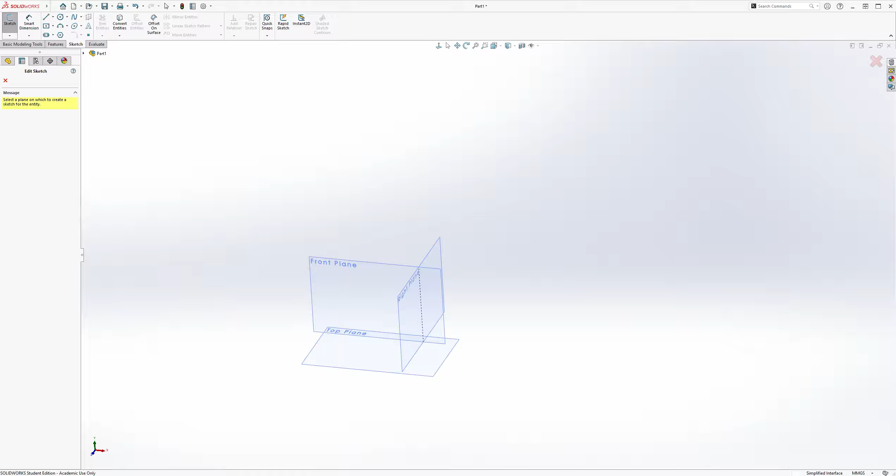So let's get started. Today we're going to be making a cup with a handle. And this part, I actually had to re-record this because I got stumped on the part where you hollow out the cup, but I'll show you exactly how to do that later. This is actually a very interesting part, probably one of my favorites I've done so far.

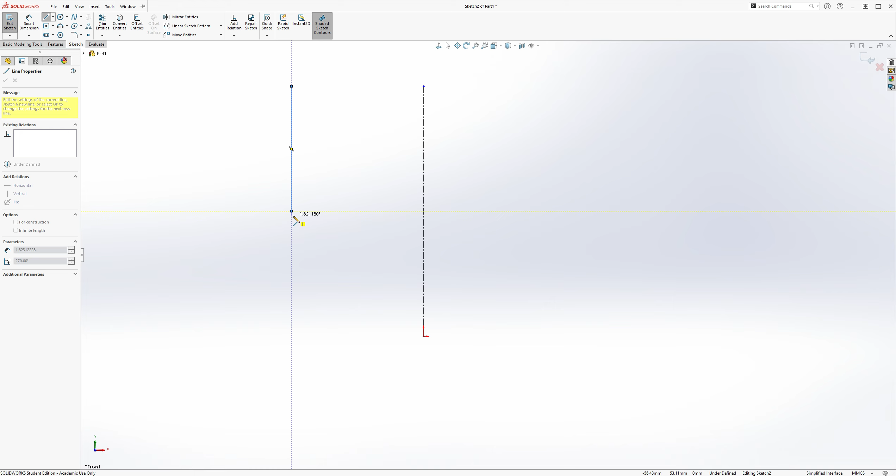But first, make sure your units are on MMGS down here. Then we're going to start with a base revolve. And if we need a revolve, we need an axis of revolution. So I'm going to start with a straight line down like this. Then we're going to go into an arc, a steep arc, till it's horizontal with the origin, and I'll finish off with a horizontal line.

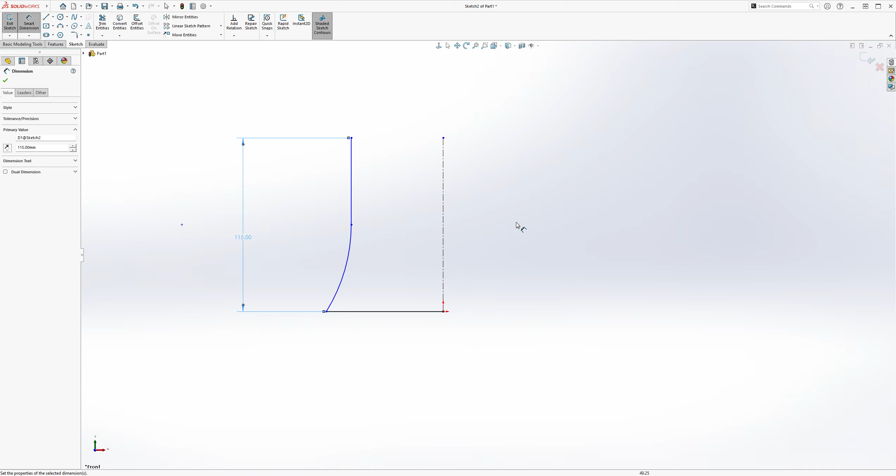And so let's start our dimensions. The total height of this part is going to be 115. Now let's establish the total width. The total width will be the bottom of the cup, which is going to be a diameter of 100. So I'm going to click this far left corner, hold onto the center line, and then drag it down. That's a unique tool in SolidWorks, which actually allows you to kind of have a preview of the total revolve. Really neat feature.

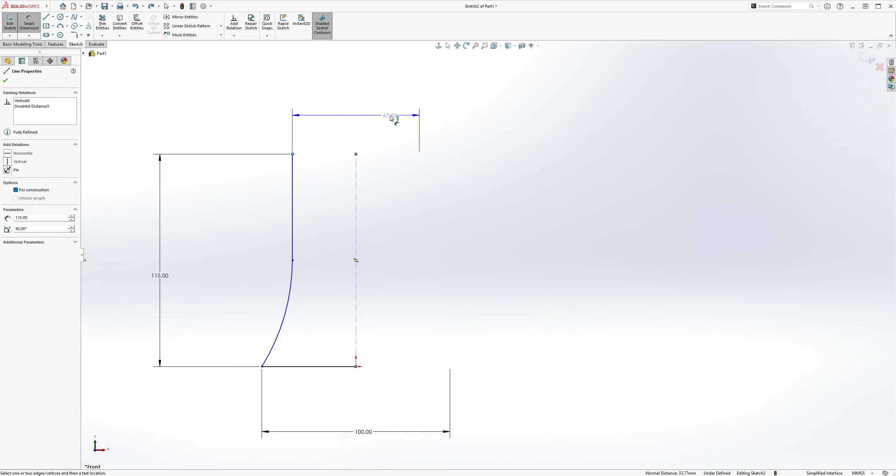And we're going to do something very similar on the top side. We're going to click on this top point, hold the center line, and drag it up. Oh, I did that wrong. Let me go back. Click on the top point, hold the center line, drag it up, and the top diameter is 75. So I'll make this 75.

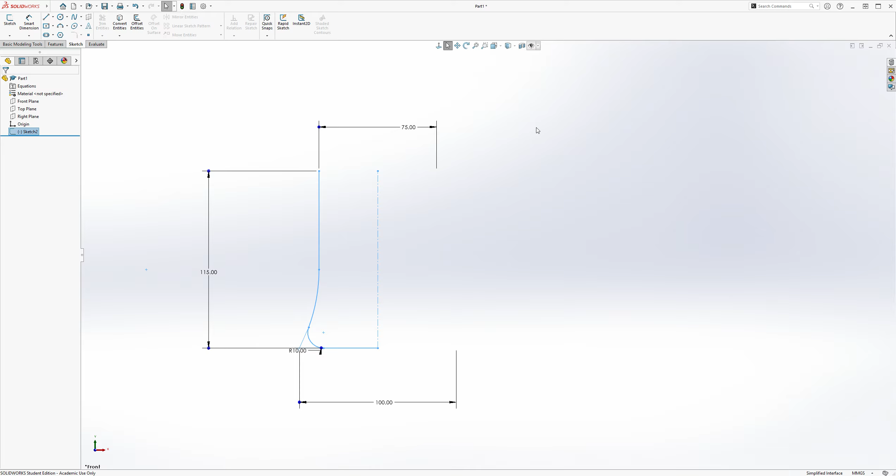Now let's add a fillet of radius 10 to this bottom corner here. Select OK. And you'll see that all the tangent, well actually I believe I have my constraints turned off. Yes, I actually have sketch relations turned off. I don't know why I had them turned off. That's weird. Alright, let's go back to the sketch. Now you can see sketch relations.

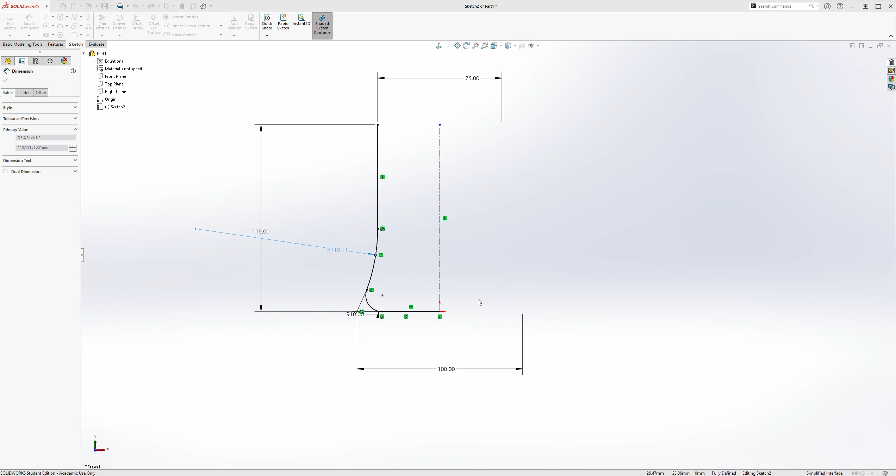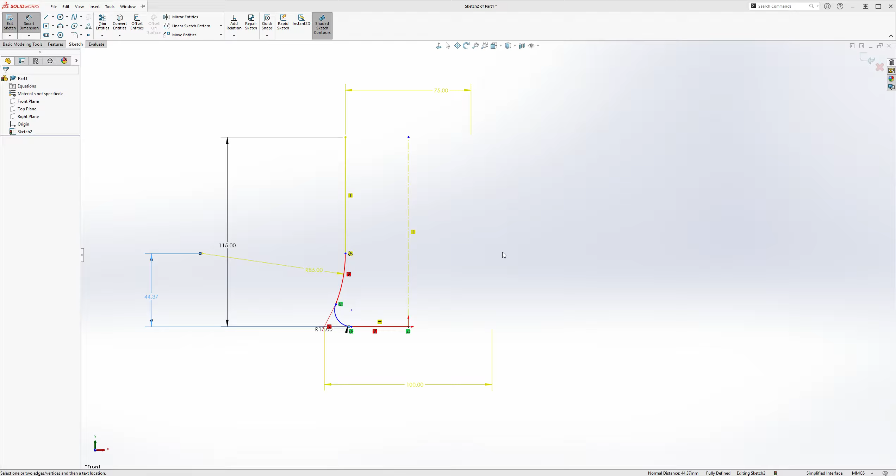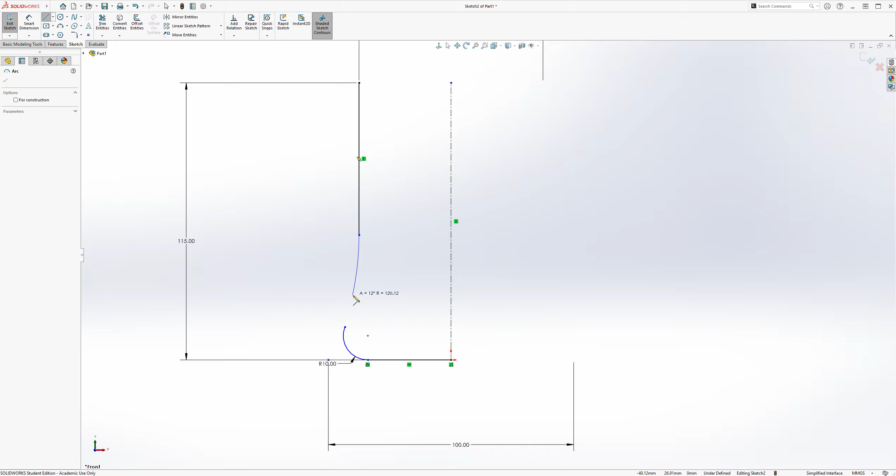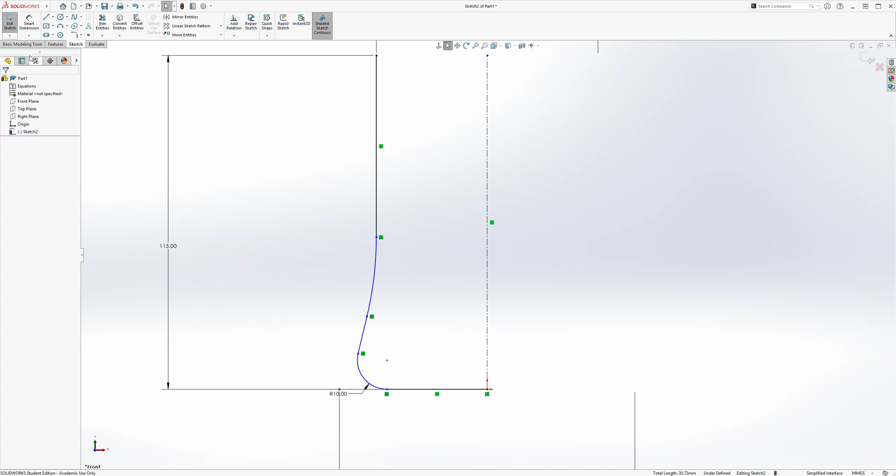I forgot that there's actually supposed to be a diagonal line. So it's like you make a steep arc, like so, but then there'll be a diagonal straight line like this. The drawing is a little deceptive. It all looks like one arc, but it's not. So let's add our tangent relations between diagonal line and arc, and then the diagonal line and the fillet. So it's all tangent. And now the angle dimension between the diagonal line and horizontal is going to be 75 degrees.

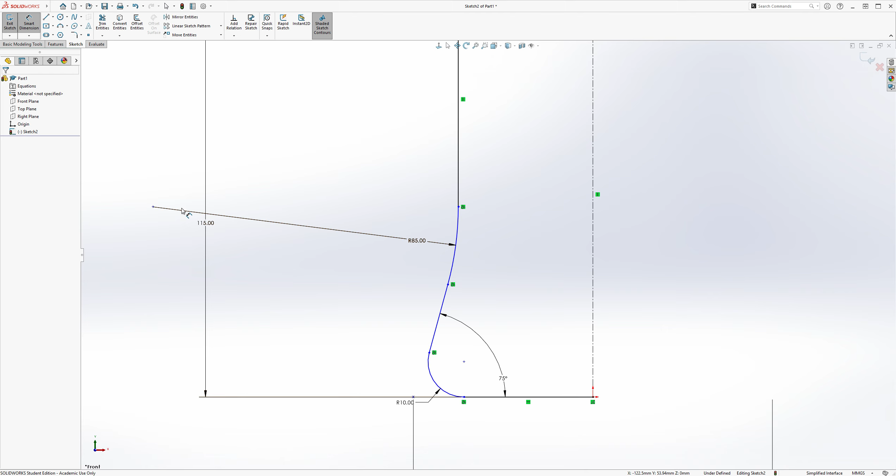And then let's go back to the arc. So radius is going to be 85. And now you notice the center point is actually not fixed. So that's where the 50 comes in. As I was saying, in the section A view, that 50 dimension is referencing the distance from the center point to the base. So we can fix this center point of the steep arc. And now you should have a fully defined sketch.

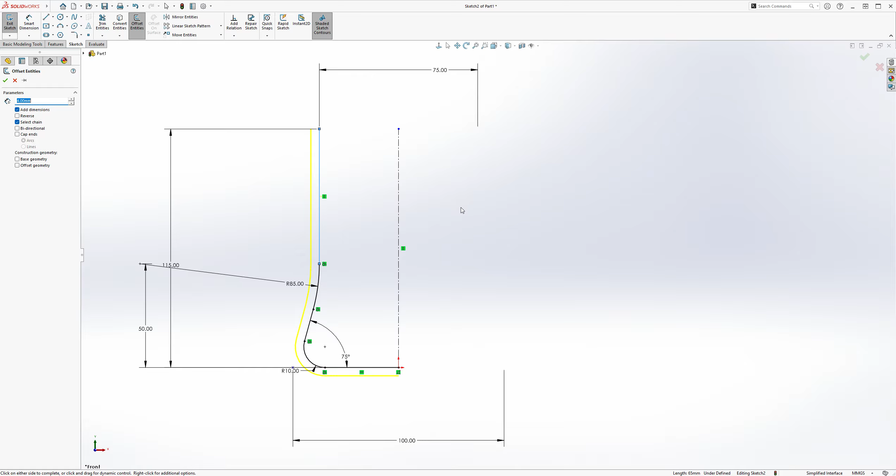And the last step here is to do the offset. We're going to offset it by 4 for 4 thickness. And like I said before, we were dimensioning the outside surface. So we're going to reverse the offset to the inside, and we're going to cap ends with lines. Select OK. Now all that's left are the R1 fillets, and they're going to be at the capped end corners.

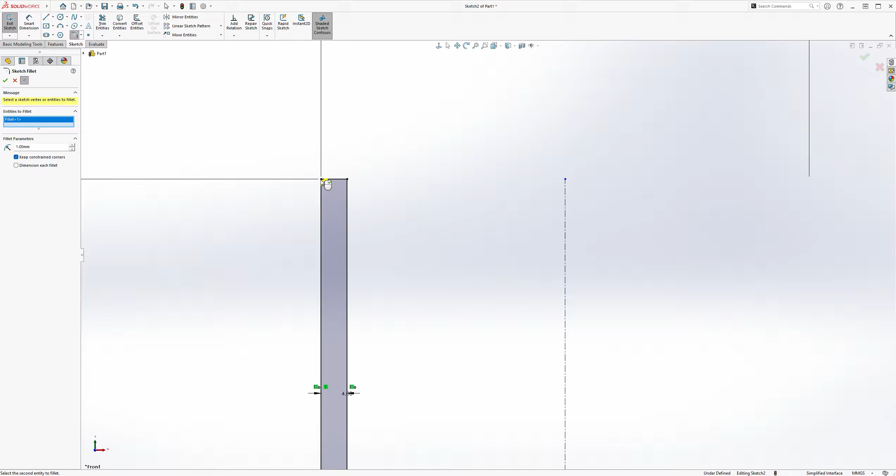In order to fully constrain it, all you have to do is just make sure that this line is vertical and this line is horizontal. Now you have a fully defined revolution sketch. Actually, is it fully defined?

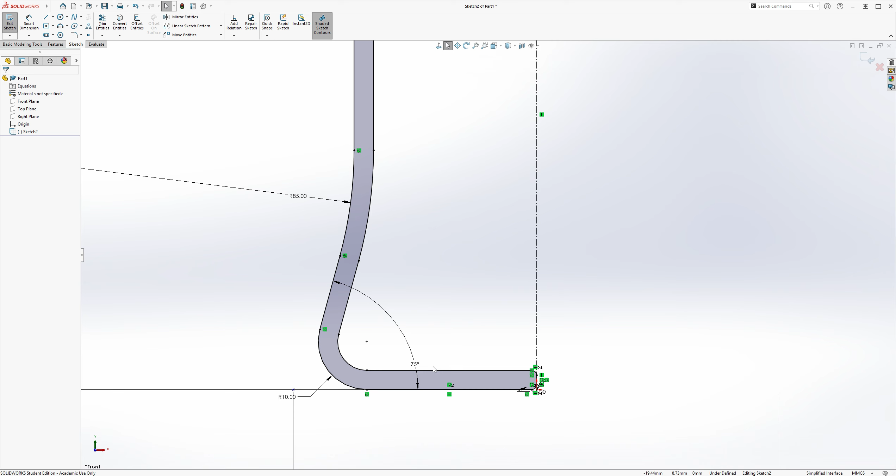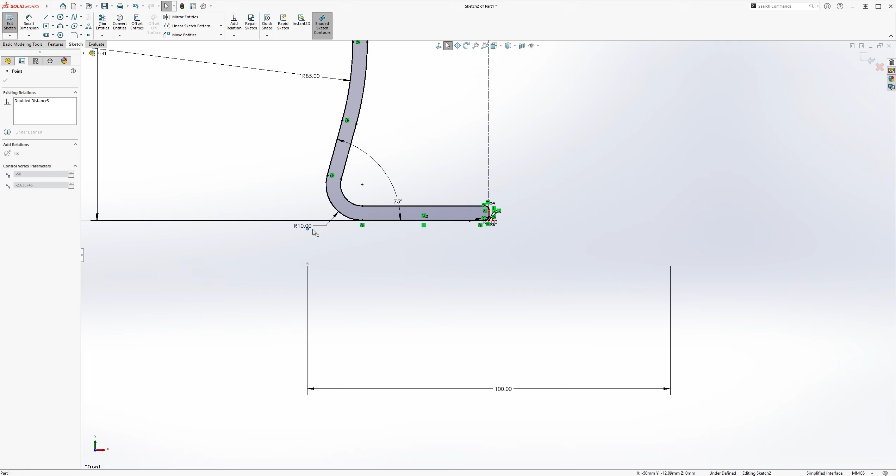Should be fully defined. Let me check again. Nope, it says underdefined. Wonder why it says underdefined. Underdefined. Oh, what is this? The corner point. I don't know. Oh. Interesting. What if I delete this corner point? Now we have a fully defined sketch. Interesting. Okay.

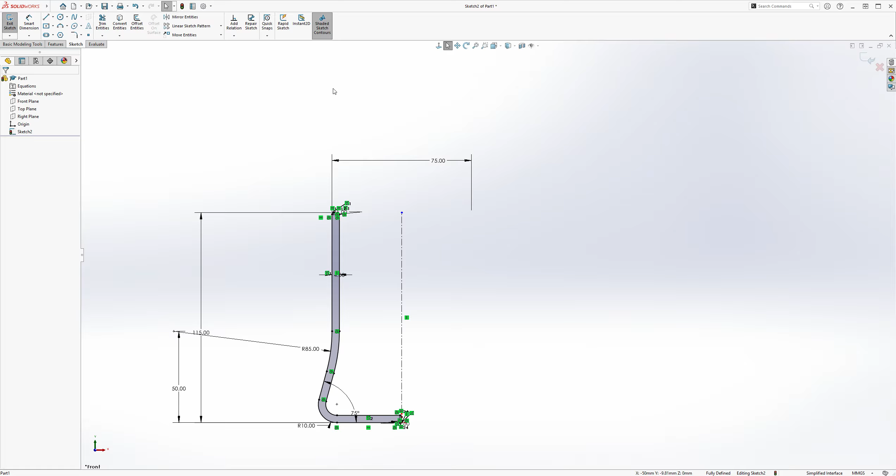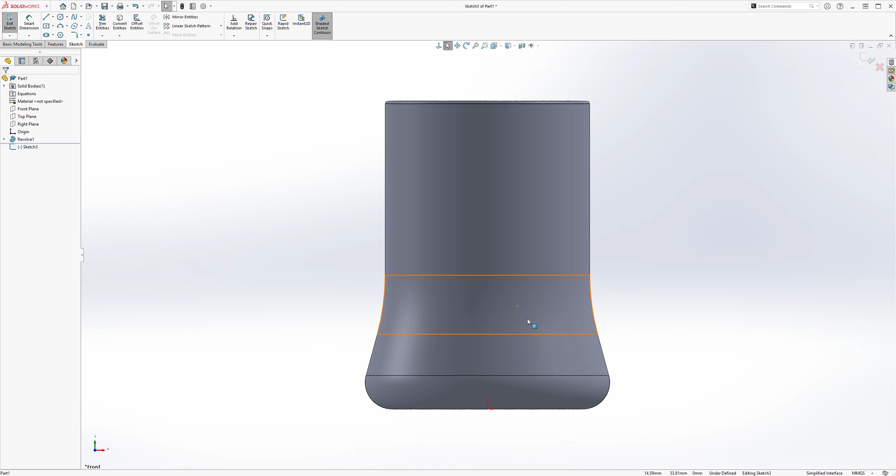So, okay. Sorry about that. So we're going to revolve this feature. Choose this as the axis of revolution. Select OK. Now you have your base cup. And now we're going to start a new sketch in the front plane. And we'll start with the center line, like so.

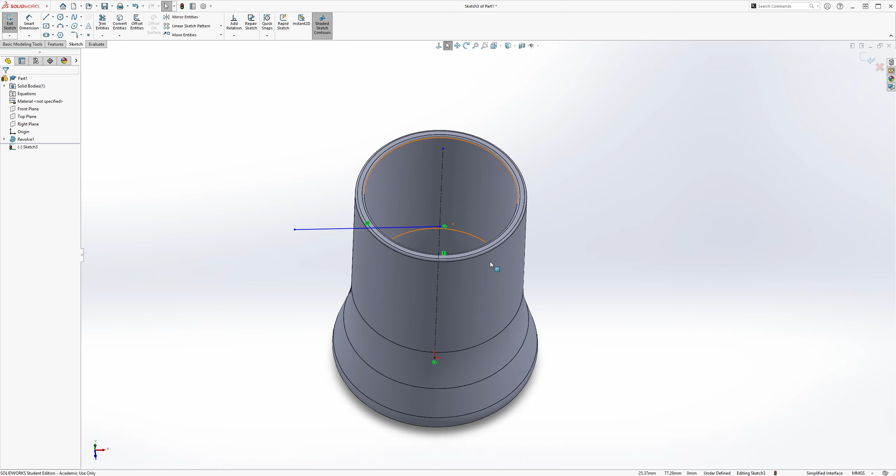Now, in the front view drawing, it actually tells you to create the sweep so that it's connected to the center line like this. And you may think this is strange because sweep is supposed to be for the handle, which only exists on the outside. But the reason why they did it like this is because they don't want any gaps in between the handle and the cup. And so the only way to do this is to extrude a sweep through the cup.

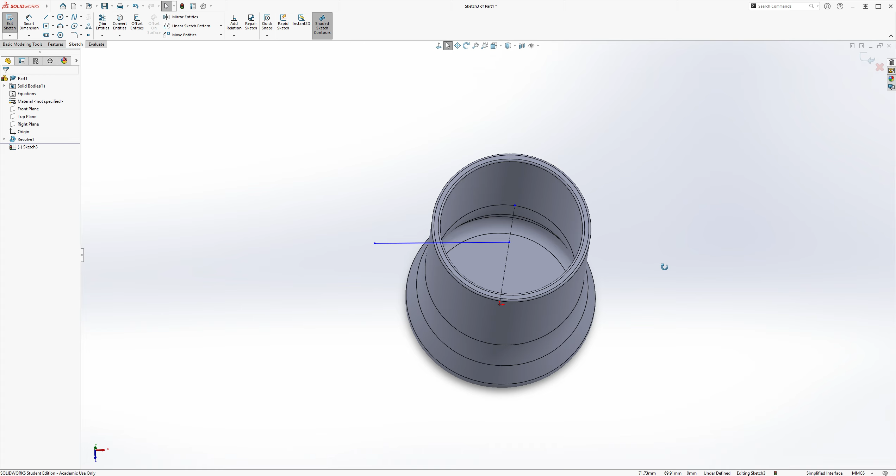And obviously that solves one problem. You get rid of the air pockets, but then it creates another problem, which is that you'll have excessive sweep in here. But to solve that, you're going to do a revolve cut inside of the cup to hollow out the cup and get rid of the excess sweep. And I'll show you what that looks like in a second here. So you start with the horizontal line. Let's dimension the distance from the top as being 18, like so.

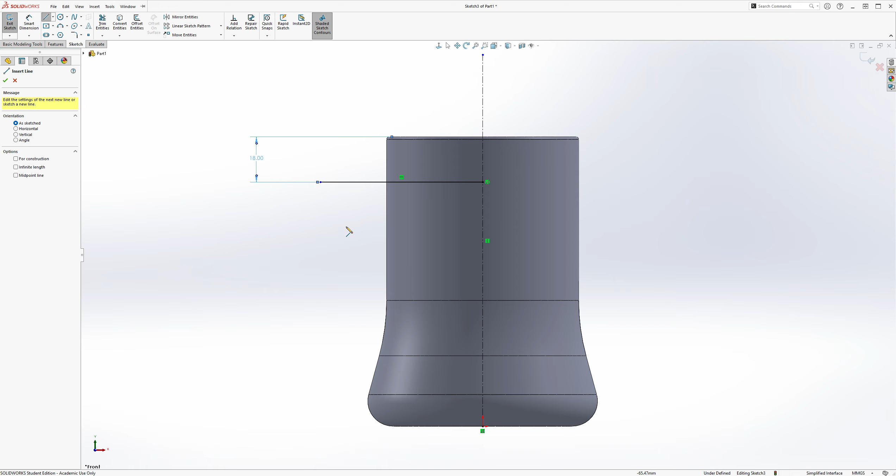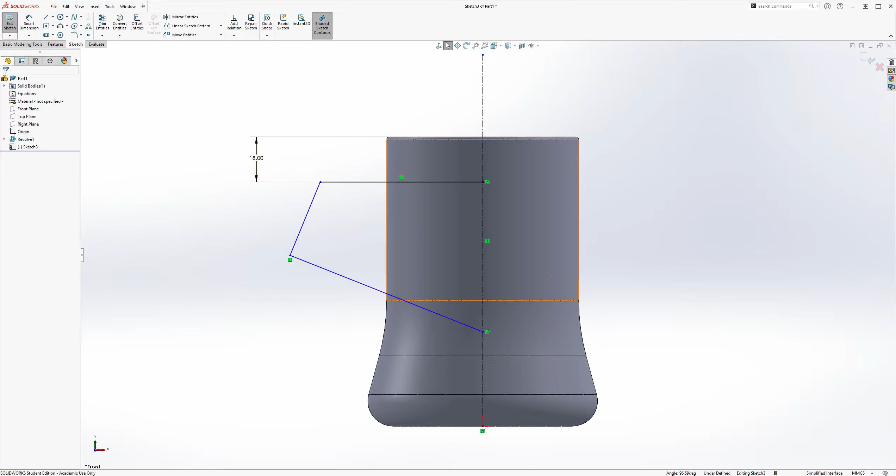Let's add a diagonal line like this, and then let's add another diagonal like this. Now, these two diagonals are actually perpendicularly constrained, so we'll do that. It doesn't tell you directly, but it is implied. If you look in the detail B view, it's pretty clearly perpendicular, or otherwise they would have added other dimensions. And we will add an angle between the diagonal and the horizontal as being 110 degrees.

Total length of the diagonal side. Oh, not like this, not like this. Total length of the diagonal side, like so, will be 40. And there's also going to be a fillet of 12 for both of these corners. Select OK.

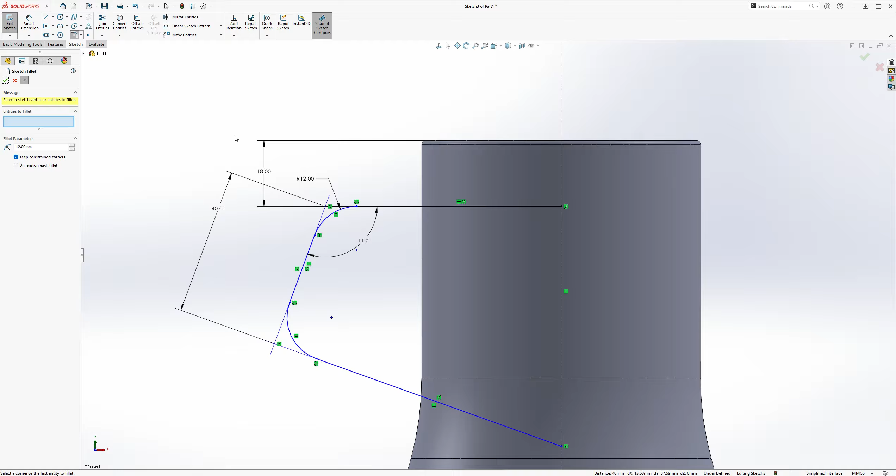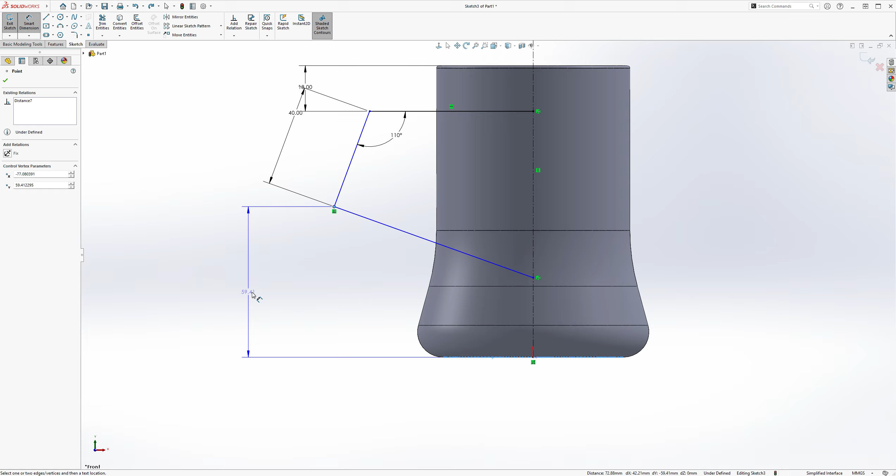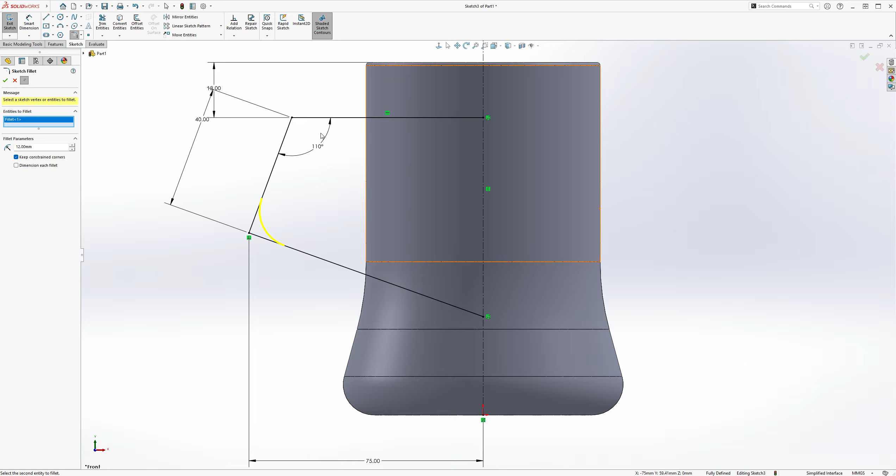Actually, before I do those fillets, let me add a dimension that I missed. So the dimension between this left side corner and the very bottom is going to be, let me see here. Oh no, the dimension from the left side corner and the center line is going to be 75, like so. And then we'll add our fillets. And the reason I had to do that is because the corner here disappeared once I added the fillets. So now we add the fillets, corners disappear, and then there's your path.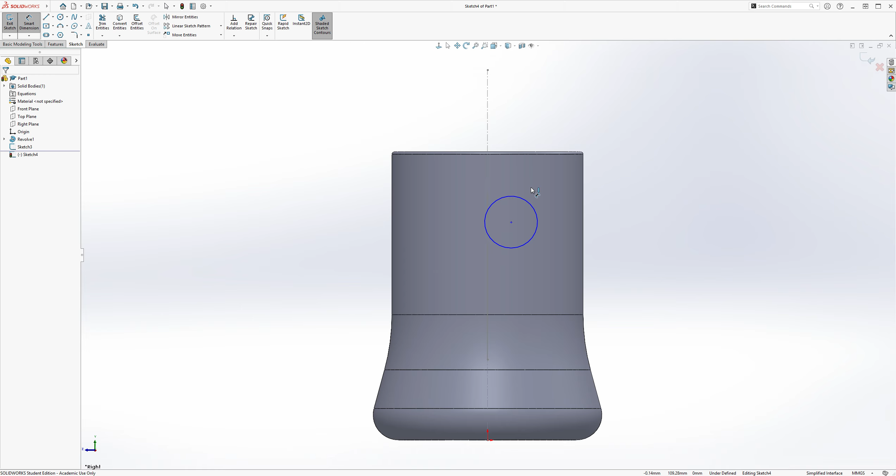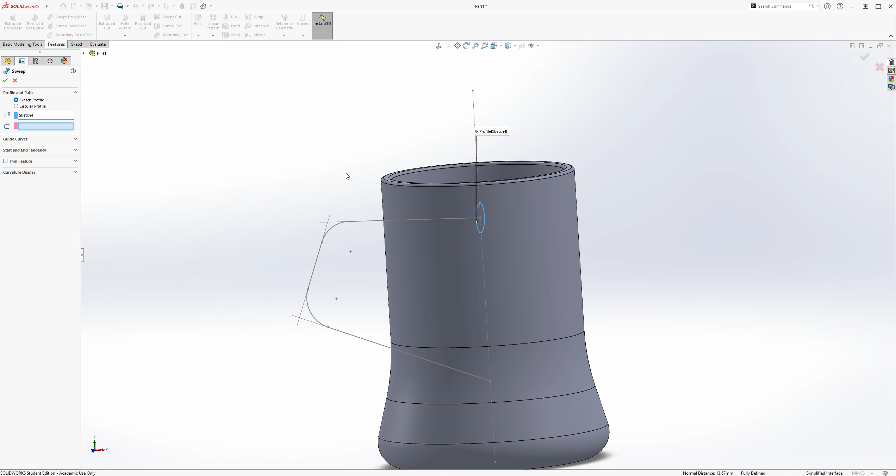So now all we need is to create a sketch in a perpendicular plane, which we'll do in the right plane. Just draw an arbitrary circle. Its diameter is going to be 12. Then we're going to select the center, select the line, and we're going to click Pierce. Select OK. Now the bead is in the string, and we're going to continue with our sweep. It selects the circle as the profile sketch, and for the path we'll select the line. Select OK.

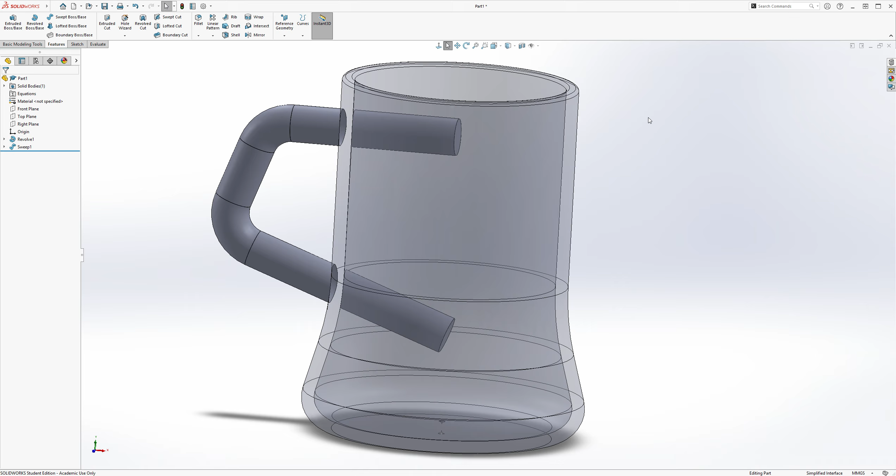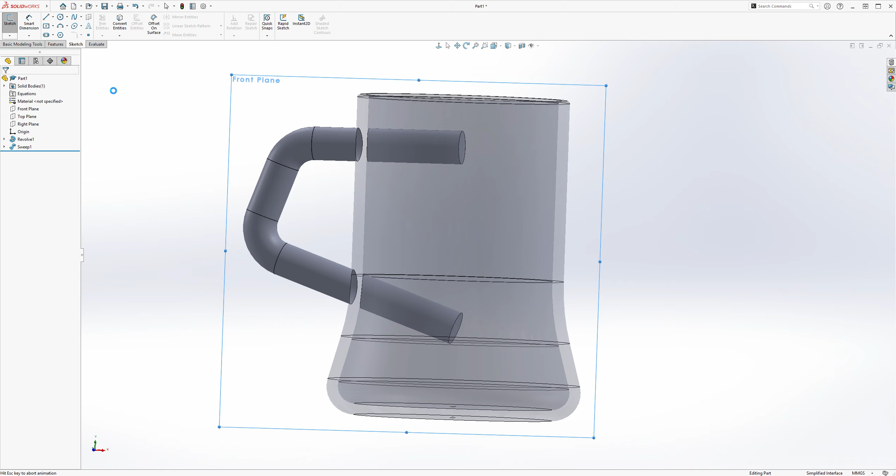And now you can see, actually I'll change the transparency of the cup just so you can see. If you right click on the revolve, and then click change transparency, now you can see that there is an excess of sweep inside. And like I said before, we need a revolve cut. And to do that, we're going to use convert entities. So first of all, I'm going to create a sketch in the front plane. And because we only need to hollow out the inside, but without breaking the original revolve of the cup, we'll only select the inside for convert entities. So I'll convert entities everything on the inside.

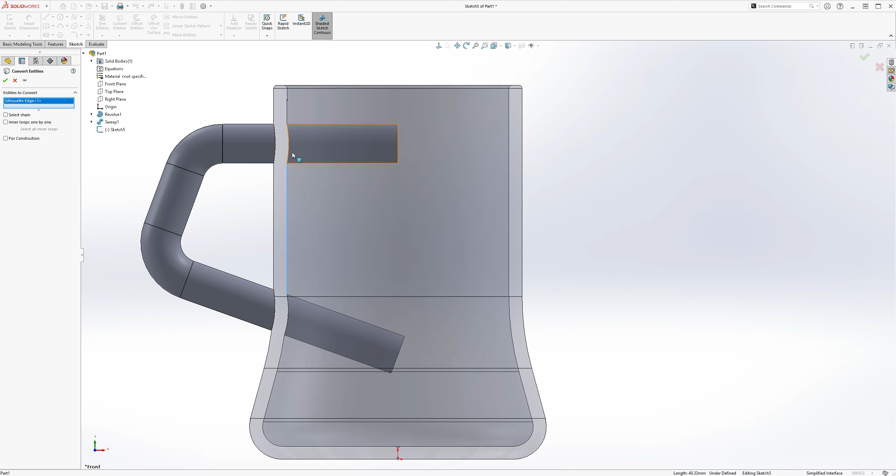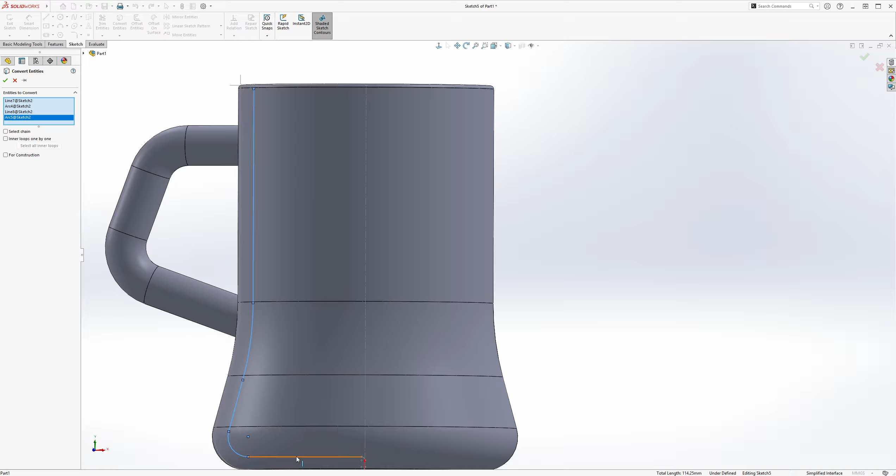Actually, let me change the transparency. Transparency is kind of throwing me off here. And I'm just gonna click on the revolve sketch instead. And I'll make it shown so I can see the lines. And then we'll go back to convert entities. And we'll select the outside lines. Or the inside lines, sorry. All the inside lines like this. Select OK.

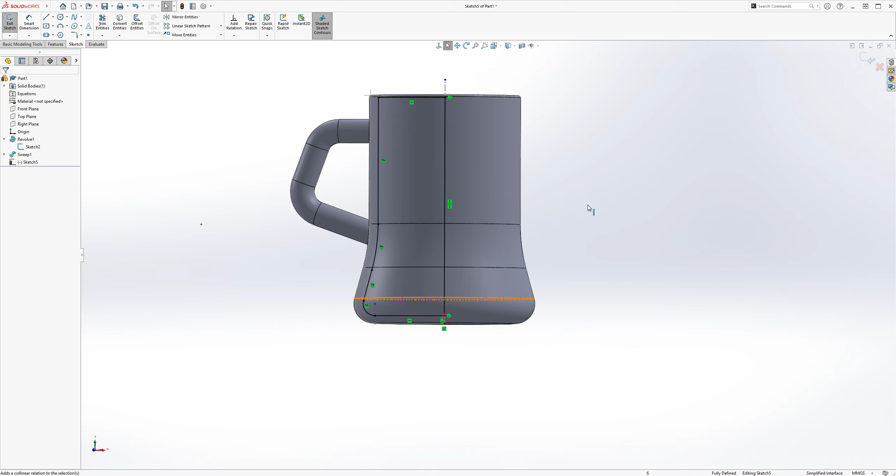Then I'll connect a horizontal line. Well, actually, first of all, let me add a center line, since this is a revolve cut after all. Center line like this. Then we'll connect a horizontal line, go straight all the way up. Actually, I will connect another horizontal to the center line, go all the way down, close the contour, and then I'll change transparency again just to show you. So this is your closed contour, and now this is going to be revolved and cut everything inside, so you won't have any of that excess sweep.

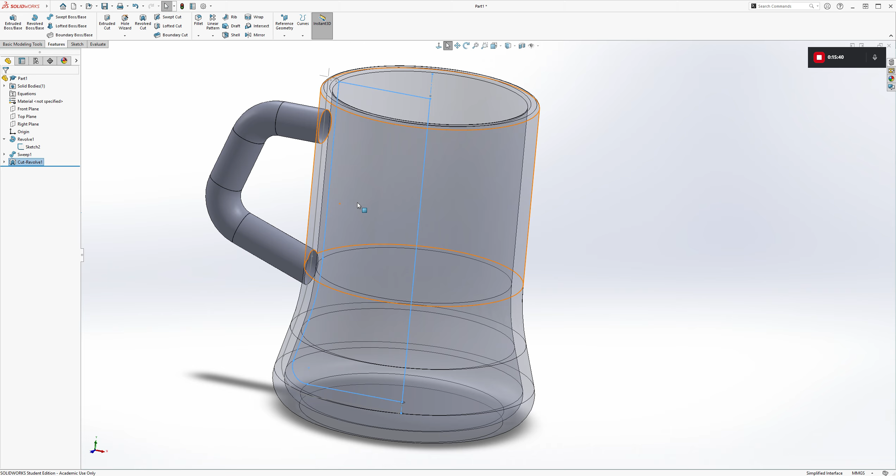So we're going to go to Feature, Revolve Cut, 360 degrees, select OK. Now turn off the transparency of the revolve. So now you can see the original cup is not altered at all, but now all the excess sweep from the handle is gone.

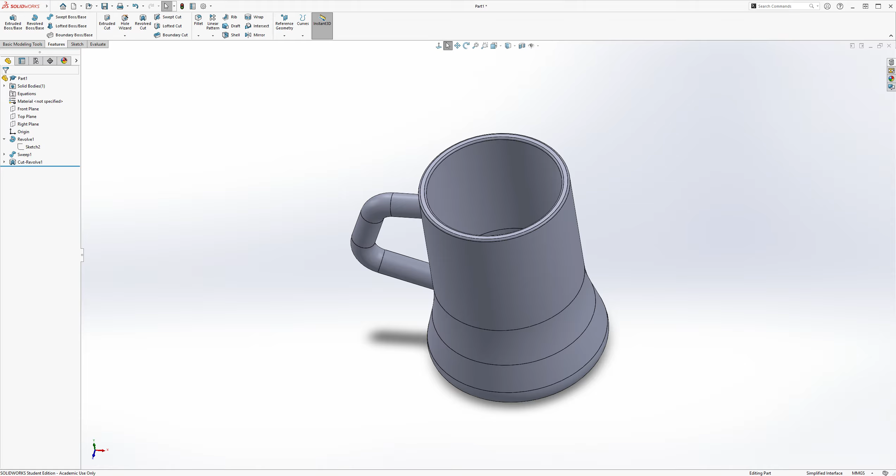And is this it? Yes, I believe that's the entire part. So let's check the answer. So let's go to Evaluate, Mass Properties. And you should have an answer of 136,136 cubic millimeters for your volume.